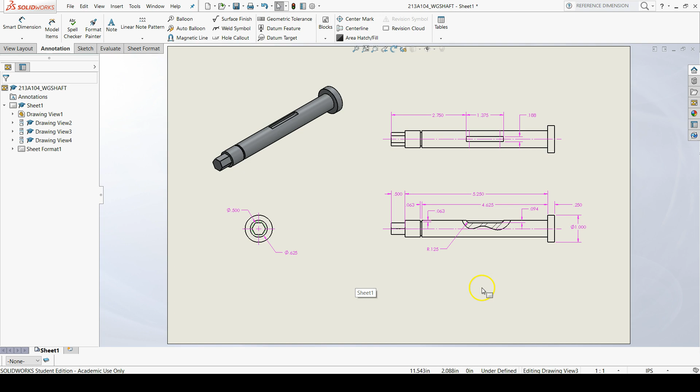So here's my 2 cents of guidance on how to produce this worm gear shaft drawing. The first cent is going to involve the title block. First off, to get the title block to show up, go to our sheet properties, where we get to by right-clicking on the sheet and then clicking the down arrow and then going to properties.

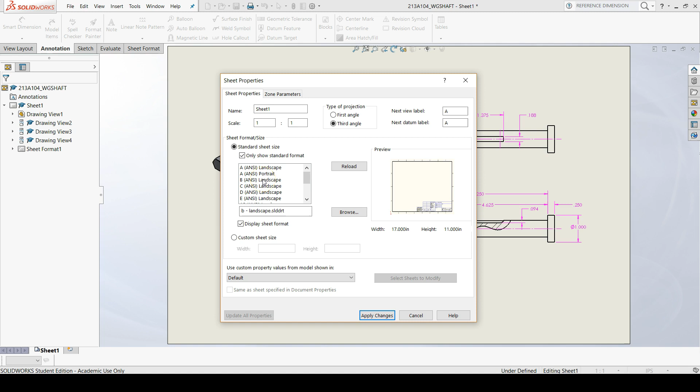To make the title block show up, we say display sheet format. This is because everything that is included in the title block, like lines for the border and tables and the notes and things, those are all created in an area called sheet format. So we get that to show up. Make sure you select the right paper size, and your border and title block shows up, but it's a little empty. It doesn't look quite like mine.

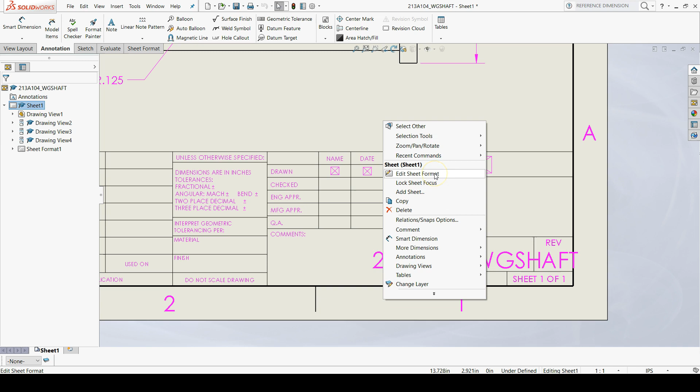To edit your sheet format, to edit the things that are in your border and title block, you can right click anywhere on the sheet, go to edit sheet format, and then there's boxes in each of these different areas. If you add a custom property here for weight, the weight will actually show up right here. If you make a custom property for your name or use the summary properties and put your name in the author section, you can input that property here. You can input your initials here.

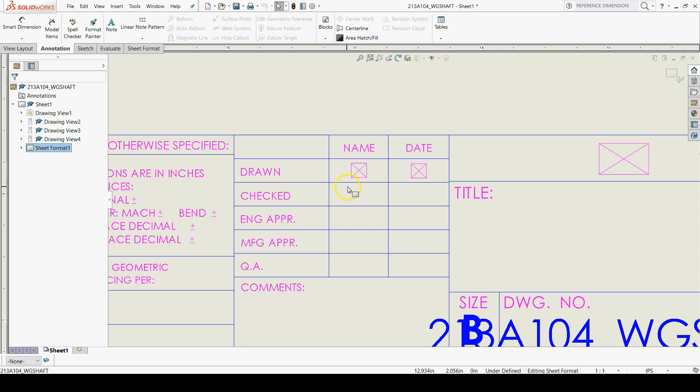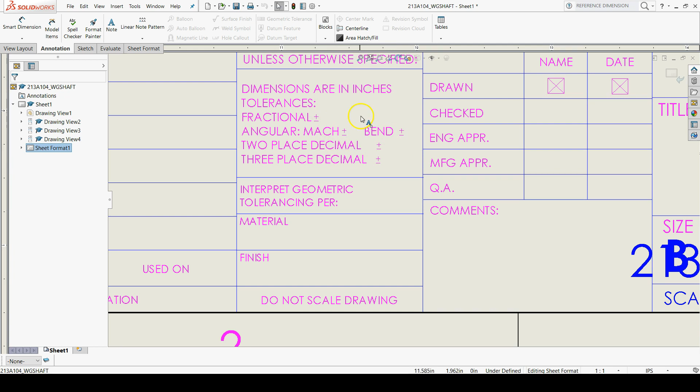And you can also put a custom property for material right here by clicking on the note box. In this section, you'll just type out what you want to type out. For the geometric tolerancing per, that's ASME Y14.5, and then I assign some generic tolerances in this section. You can also put Renton Technical College or your name here in the insert company name. You just delete this portion and then write what you would like to show up there.

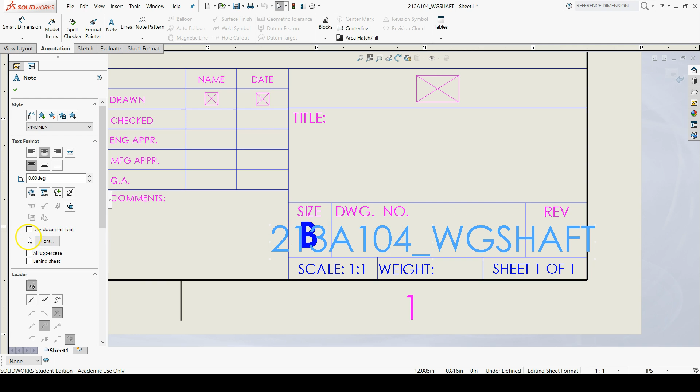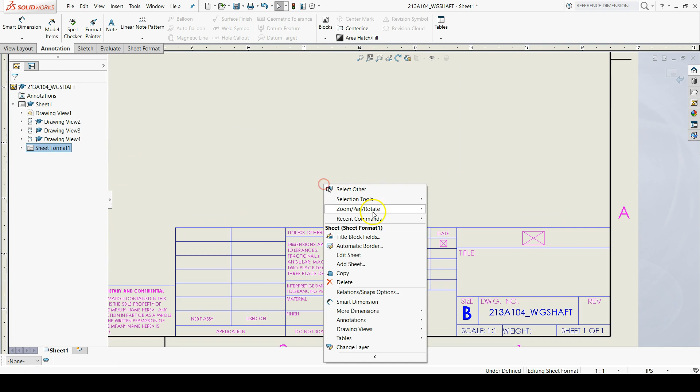I can change the size of text as well. For example, we see that this is way too big. I can go to font and change the size here. I can also just hit use document font, knowing that my document font is set to 1/8 of an inch height text. So now it fits nicely in there. The rest is up to you. For the border and title block, I'm going to go back to edit sheet so that I can see the rest of my drawing and edit the rest of my drawing.

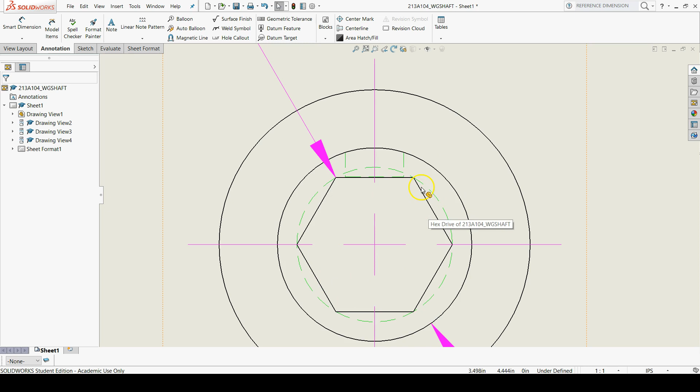The next thing I will cover is how to get this reference dimension to pop up. Well, first we need to remove the ambiguity that's caused by this hidden line and add the construction circle that was inserted into our model for creating this hex part. That's under drawing view 2, or maybe it's drawing view 3 actually, sorry. This is drawing 3 because I clicked on it and it says drawing 3 right here. So I'll go to drawing 3, open up the part feature manager, go to the hex drive feature, right click on the sketch and say show, and this shows me the sketch.

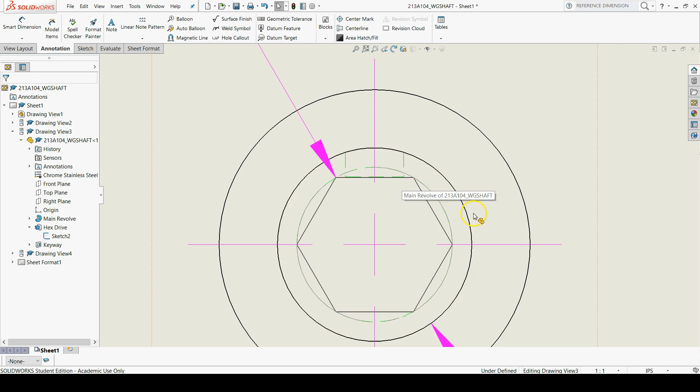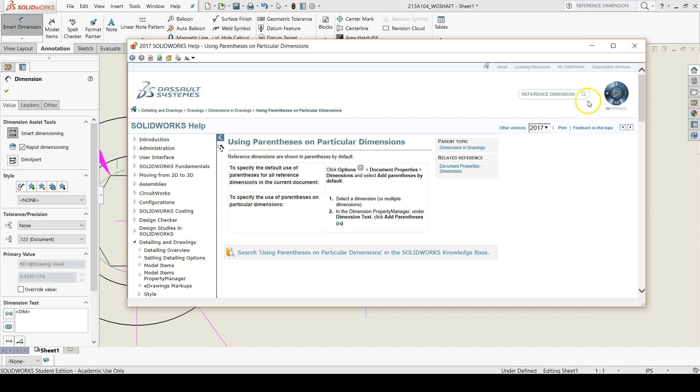And then to figure out how to add the reference dimension, I know first I gotta put the dimension in with a smart dimension. Then to figure out how to put a reference dimension, I can type reference dimension into the SOLIDWORKS search right up here, and then search that. I already had it up, so I'll type it in right here. Reference dimension, search. There we go. And I'm looking for something that might be related. I think this thing that says reference dimensions, that's the most related thing we got. So I'll click on that, see if I can figure anything out.

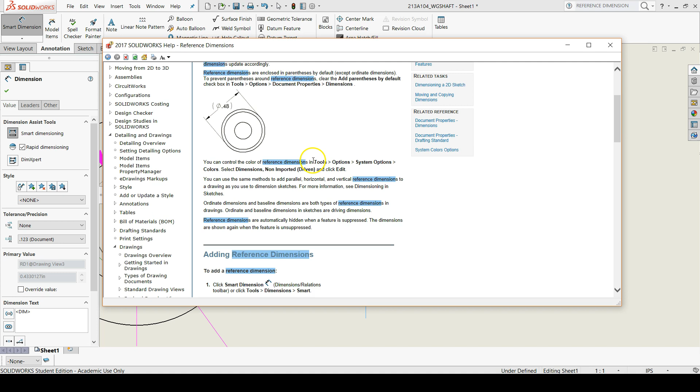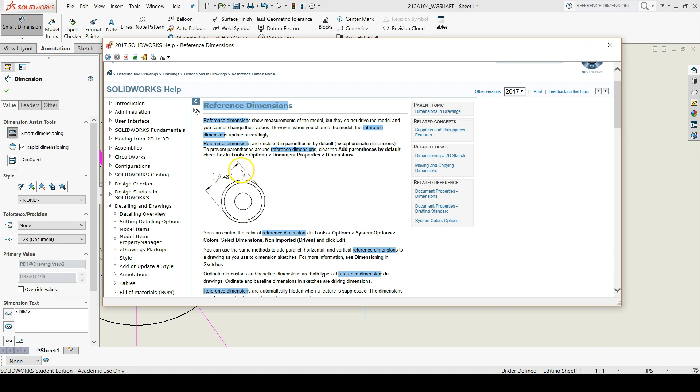I'm reading and it looks like it's only telling me how to make it the default to add reference dimensions. I want to add a reference dimension to a specific dimension, not all of my dimensions that I place. So I'm still not seeing anything related to that. So I can look in my related topics section. I don't see anything that catches my eye. I might try dimensions in drawings, but that sounds like too much of a tedious search. What I'll go to next is the left, and first find where I'm currently at in the SOLIDWORKS library. I'm right here at reference dimensions, and then I'll look close in the vicinity, see if I can find something that might tell me how to add parentheses to my dimension to make it a reference.

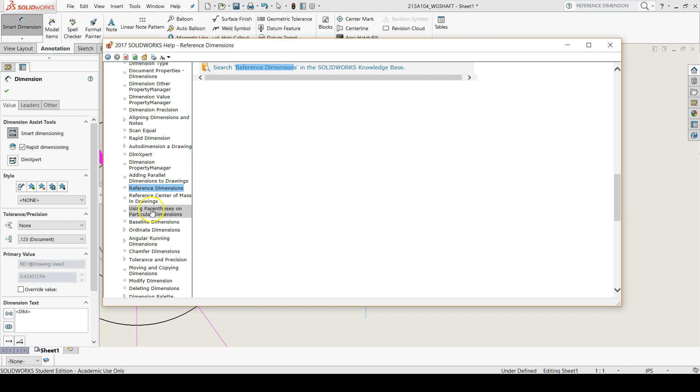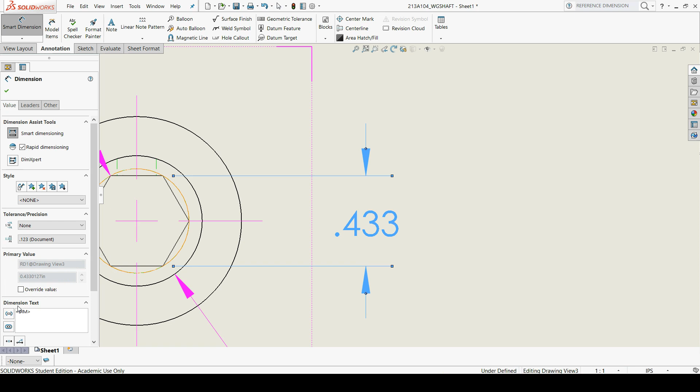And it looks like I have using parentheses on particular dimensions. Here's a step-by-step for how to add the reference dimension. First select the dimension, and then go into the property manager and under dimension text, add parentheses. Let's give it a try. Select the dimension, go to dimension text. Oh, and there's the add parentheses button. Voila. So I'll leave the rest to you.